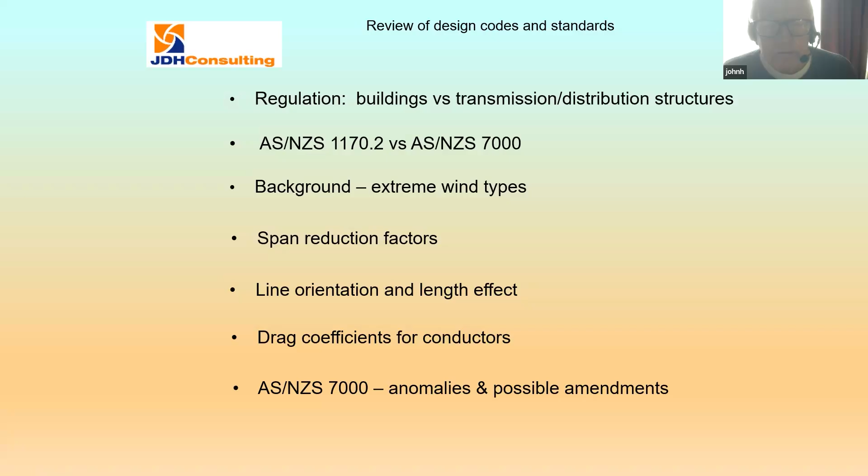So these are the topics I'll be talking about for the next 15 or 20 minutes. You can read them there. I won't go through the detail until we come to them. So the first one is on regulation, just a couple of slides and the background to why we're using codes and standards of a certain designation and what their relationship is. So most of you will be aware of AS/NZS 7000, which is overhead line design. I think the first edition was 2010. The current edition still is, I think, 2016.

Now, there's a relationship between that one and the Structural Design Actions Wind Actions Standard, AS/NZS 1170.2, which Matt and I have been involved in for quite a few years. And in my case, back to the last century I was starting to get involved in it. But the thing about it, as I'll show on the next slide, is that 1170.2 explicitly excludes transmission lines and distribution lines. So it's a problem. So this is the relationship between 1170.2 and the National Construction Code, which despite its name does not cover anything except buildings.

Used to be the Building Code of Australia. Now it's just Volume 1 is still the Building Code of Australia. And the way 1170.2 operates, it gets called up as a source of loading, wind loads in this case, but other types of loading are called up in other parts of 1170. So the National Construction Code doesn't write its own rules for structural loading, so it relies on Australian standards to do it.

One of the ramifications of that is that they're very fussy about how the standard is written. In 1170.2, you've got to use the word shall. You can't use should or may, and it has to be a well-defined path as far as they're concerned. So that's the relationship between the NCC, 1170.2 and 7000.

Now, what about the actual regulation of the structures? I know the energy networks are regulated from a financial point of view and electrical point of view, but I'm not sure how the structural side of it's regulated. It seems to me that it's largely self-regulated by the networks, and that probably goes back to the old days when each state government had its own control of its own network.

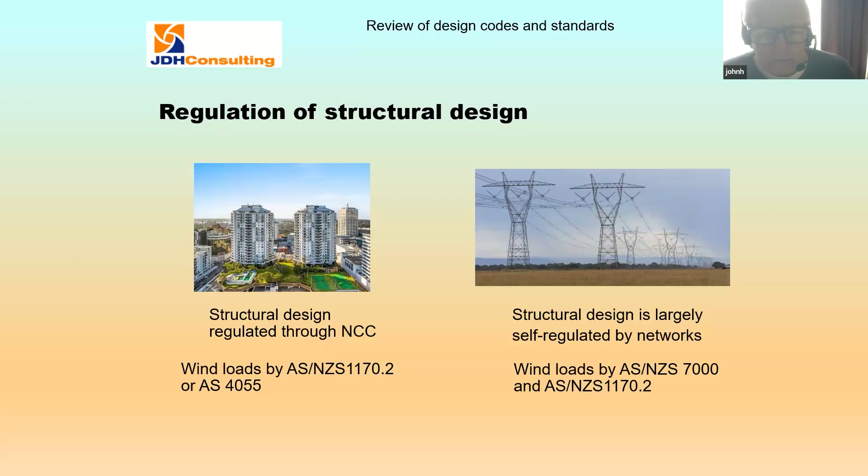But it's quite different for 1170.2. As I mentioned earlier, it's regulated through the NCC, which is effectively the law of the country with regard to buildings. So there's a difference there.

1170.2, as I mentioned earlier, page 1, clause 1.1, excludes tornadoes and excludes transmission line structures. Now, we know that tornadoes can actually damage transmission line structures as well, so it's a bit of a problem. That doesn't mean you can't use it. I think it's got a lot of useful information on things like shape factors for lattice towers and tubular towers, which you probably need to use because I don't think that's covered in 7000.

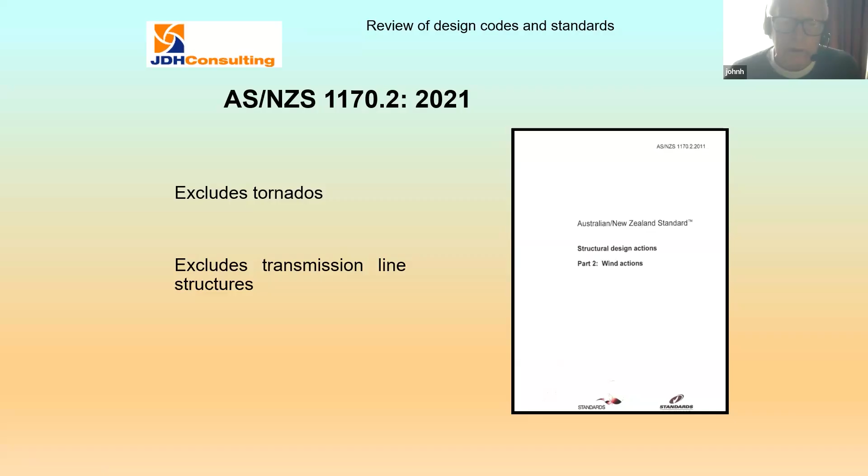It refers to 1170.2. So even though 1170.2 excludes transmission lines, we try to provide useful information in there for other structures.

Now, AS 7000. I said the first edition was 2010, and I wasn't on the committee myself, but I had quite a bit of input into it through Henry Hawes from PowerLink. He might have been the chairman of the committee, I'm not sure, but I knew him quite well, and he asked me to provide quite a few bits and pieces, especially in Appendix B for wind loads.

But in this project, I've actually gone through the front end of the standard, which I wasn't really familiar with before, and looked at sections 6, 7, and 8, and I've made a few comments on those in the 8-page report I did. And I think one of the issues is that those earlier sections don't really reference Appendix B in the right places. Maybe they're written separately or something. So there could be a bit of editorial improvement there.

Let's just go to what's in Appendix B. In 15, 20 minutes, I'm not going to go through every detail of wind loading. Just pick out a few highlights. Now, you'll see this map in there, which is not the same as the zonal map in 1170.2 for Australia. It's a special map that we produced for 7000. It really just tells us the type of wind events that are dominant in various parts of the country.

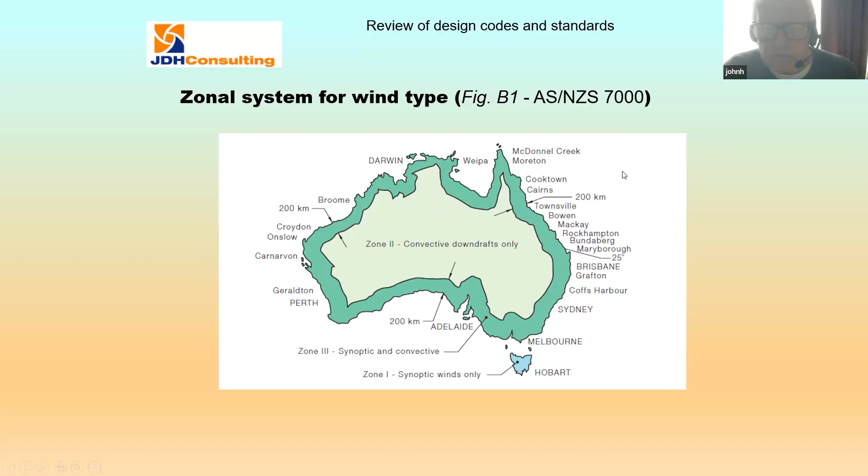I think in Appendix B, it suggests that in Zone 2, you need to design for convective downdrafts because they're basically the sum total of extreme winds. The synoptic winds are very light and not of much interest as far as structural loading is concerned. But you notice Tasmania is pretty much dominated by synoptic winds, whereas the green area, Zone 3, has a mixture of synoptic and convective events, which makes it a bit messy to codify. That's nature. I'm not going to give you a lesson on meteorology in 2 slides, but just to give you some idea of what we're talking about here.

The large-scale synoptic winds, the wind engineers sort of call them boundary layer winds because they can be reproduced in a boundary layer wind tunnel. It blows over long distances over the rough Earth's surface. If it is rough, you've got buildings in there and trees, creating some turbulence and a profile, as you see on the right there. So the wind speed is varying with height, up to probably something of the order of 1 kilometre when it's fully developed.

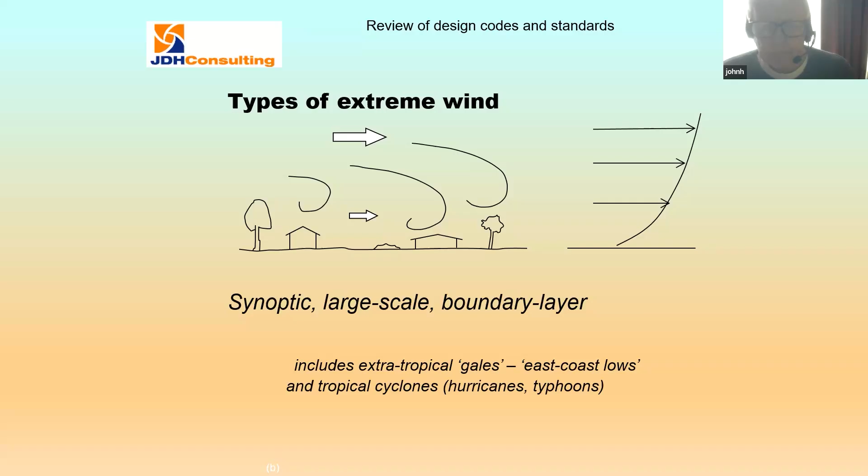So we're talking about extratropical gales is one term that's used. It also covers east coast lows that affect most of New South Wales and parts of southern Queensland, I think, and also tropical cyclones in the north part of the country, also known as hurricanes and typhoons in other parts of the world. Whereas a convective downdraft affects this middle part of Australia, 200 kilometres or more from the coast, but also other parts, but it's the dominant for the middle part of the country.

It's created by convection, as you can gather from the name, which is warm, moist air getting pushed up under convective forces to something of the order of 15 kilometres above the ground, then rapidly cooling, may produce hail or rain or both, and then becomes colder and falls under gravity, essentially, and eventually hits the ground like a jet. And it produces a small-scale frontal storm that gives a profile, as shown on the right there.

So the peak varies from event to event, but it's probably of the order of 50 to 200 meters above the ground. So instead of the 1,000 or so profile with the wind increasing, at some point it'll start dropping off. And of course these are short duration events, maybe 3 to 4 minutes typically, and affecting maybe a couple of kilometers wide. In terms of transmission line spans, I think we're talking about 3 or 4 or 5 spans typically.

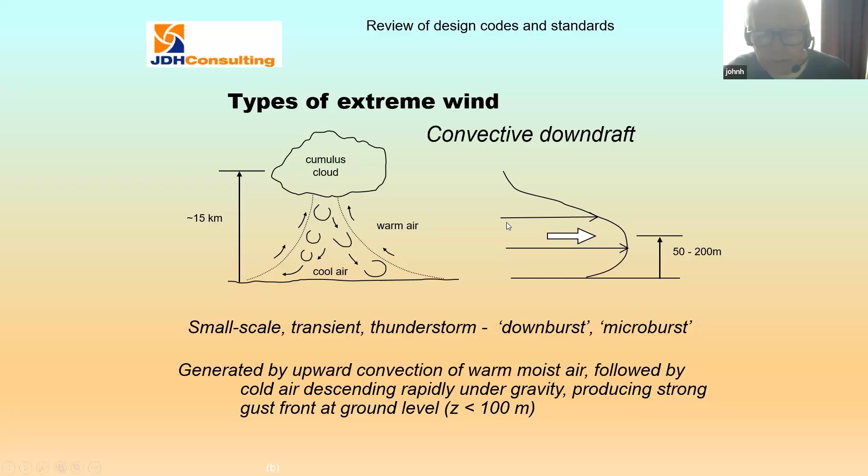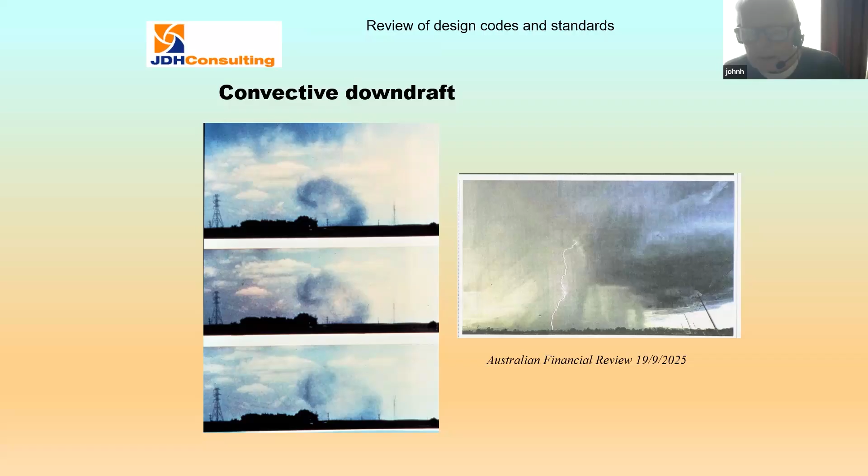The one on the right there I just picked up a couple of months ago, in the AFR, Australian Financial Review. Somebody managed to get a picture with presumably their mobile phone. And again, you see what look like distribution lines on the right there. I think they're not leaning over like that; it's probably distortion of the camera. But you see the lightning in there. So these are associated with thunderstorms typically. Though you do get dry microbursts as well, which are probably not quite the same, but they do produce this downward jet of air. So why are we interested in those events? Apart from the fact that they're the dominant event in the middle of Australia, they do damage a lot of transmission lines.

Span reduction factors, so moving on. This is something you'll find in that Appendix B. What is a span reduction factor? Basically, if you're dealing with synoptic winds, which is where the idea came from, it allows a reduction in the peak load, assuming that the peak pressure does not occur even over one span in synoptic winds. Just the fact that we've got turbulence in there, which is gustiness, producing fluctuating pressures that don't occur simultaneously. The peaks don't occur simultaneously over even 500 meters. Could be typically 100 or 200 meters maybe.

But in general, if you're in a rougher terrain, which gives you higher turbulence or gustiness, then you'll get a reduction in load through a lower reduction factor. On the other hand, these convective downdrafts, from the information we have got, which is a bit limited, certainly indicate that the turbulence is effectively lower because the wind is not blowing over this rough terrain. It's coming down from above, so there's not a mechanism for generating as much turbulence in the flow.

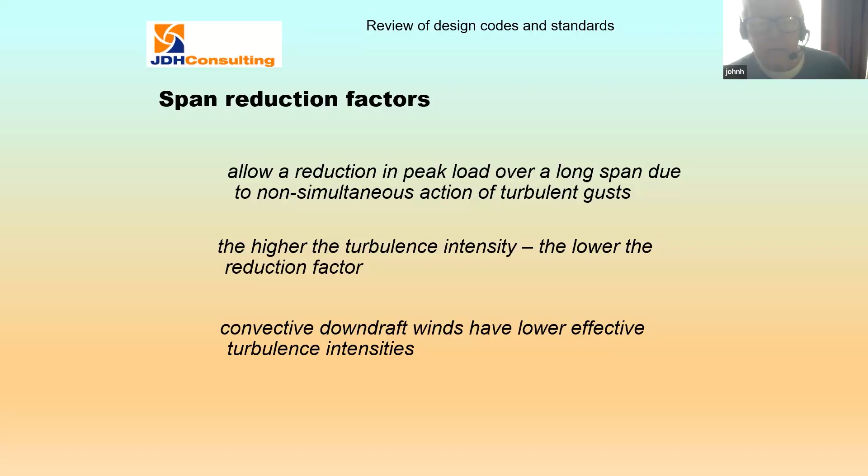So that means you've got lower turbulence, you're going to have higher span reduction factors, which means less reduction. And the result of that is we have figures in the Appendix B of 7000. This is for synoptic wind span reduction factor. Some of you may be familiar with it. So what it's telling you, that figure B5 there, is that if you've got a span of 500 meters, you're getting a factor of 0.63.

So that's like a 37% reduction in load just due to the fact that you've got this turbulent wind acting over a span of 500 meters. So there's a significant reduction. And you find around the world where the synoptic winds tend to be more dominant, that these, or similar values, get used very widely in other parts of the world. So these are valid for these large-scale synoptic winds.

But on the downdrafts, because the turbulence is effectively lower, figure B6 in Appendix B gives you a reduction of only 9%, a factor of 0.91 for that 500-meter span. So I think it's effectively a 40% increase in load. So if you talk about the same wind speed, say a 40 meters per second gust, a 40 meter per second gust in a convective downdraft is worth 40% more than the same 40 meters per second at a point for synoptic winds.

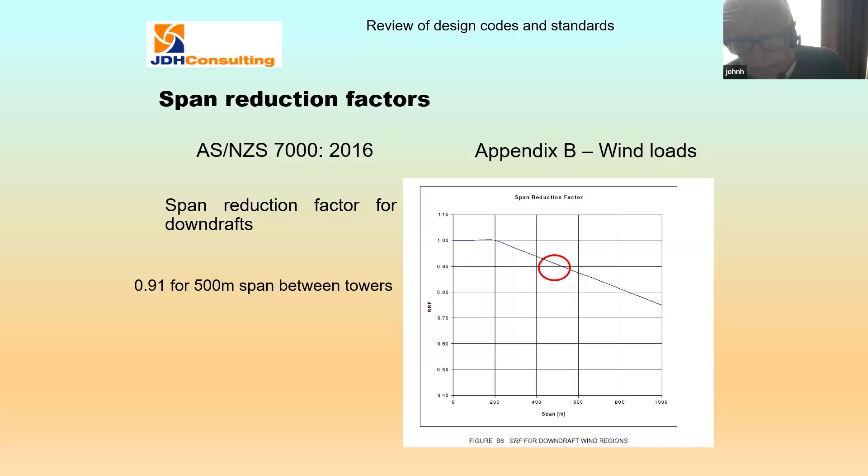So it does make a difference. Actually, that probably explains why we're getting a lot of these failures due to those type of events, and not so much due to synoptic winds.

Right, now moving on to line orientation and length effect. There is a clause in AS 7000, it's sort of an informative clause really, that says, as you can read, the return periods are appropriate to individual structures affected by either wind types. So that's in 1170.2, which is basically in there for buildings. We're interested in designing a building which effectively is at a single point. But we're talking about a transmission line which may go for 100, 200, 500 kilometers even these days.

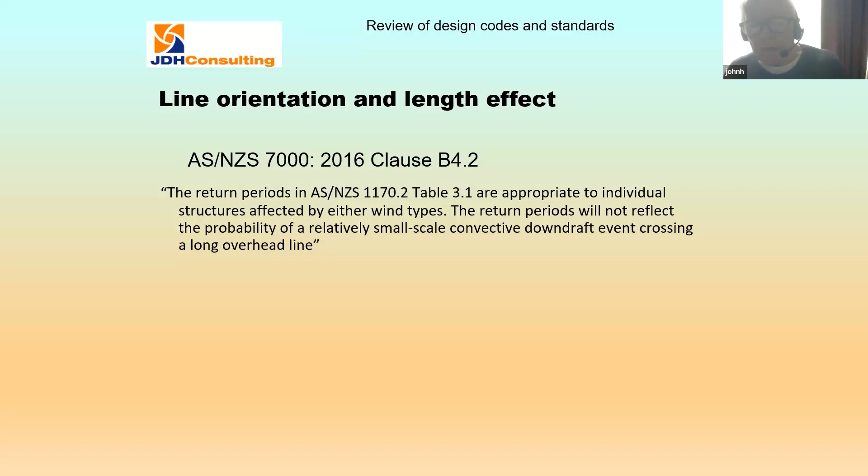Those return periods won't reflect the risk or the probability of a wind event such as this convective downdraft crossing somewhere along the line rather than at a point. And the result of this is, if you don't really take account of that, you might get some failures. And last year we had a few failures, Victoria and Broken Hill, New South Wales, and some of you may remember those. This year seems to be a bit quieter, fortunately.

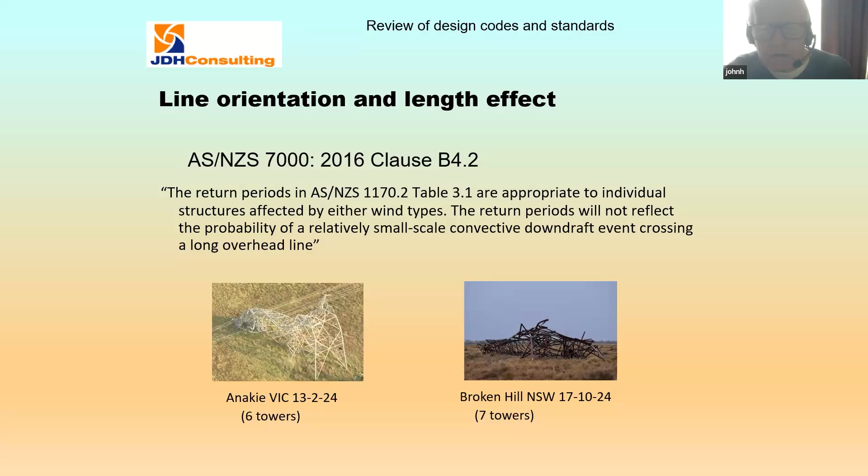But if you think about it, these storms are, as I say, a couple of kilometers in width. But if you put a transmission line in there of 100, 200 kilometers long, it's like a fishing line, and you're catching these things periodically. So you probably need to be aware of it. I'm not suggesting that you need to design for 1 in 500 or something for a whole line, because that wouldn't be economic. But I think designers should be aware of the risk of these events occurring.

Now, going back even to the late 90s, myself and Stephen Oliver, who's probably not on the line today, but he's part of this project, produced a model for calculating the risk along a line like that. And it started off with just one of these events. We simplified it with a rectangular footprint with a certain width and a certain length, and looked at the chances of that footprint intersecting with a line of length L mathematically.

And Steve actually wrote a computer program for ElectraNet. I see Roger's on the line there. He's hopefully using it. He might be able to tell you how he finds it. But I think it does give you a pretty good idea of the sort of risk on the line, depending on its length and also its orientation, north, south, east, west, or whatever.

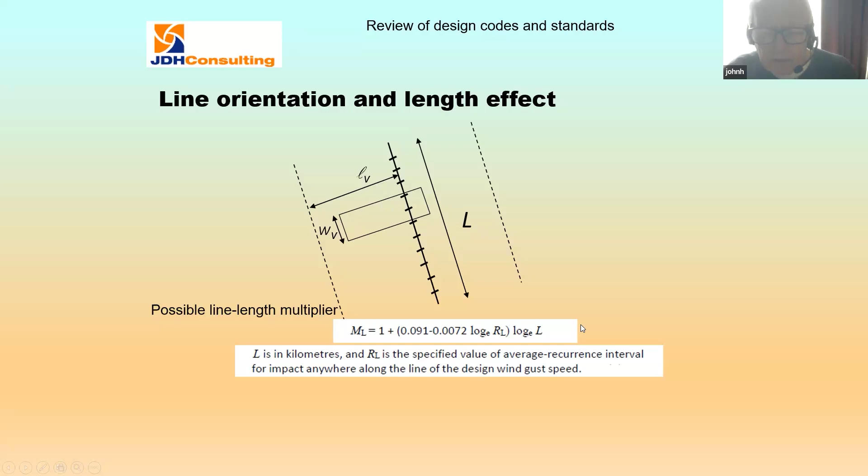Now, from a code or standard point of view, you're not going to embed a computer program in the code or standard. We haven't got to that stage yet. But one of the things I did for ElectraNet, I'm not sure they use this, but looking into the future maybe, is putting something like a line length multiplier in a standard, maybe 7000 or somewhere else, where it does recognize this length effect. The line orientation can be taken account of through the wind direction multiplier that we have in 1170.2.

So it could be something like this, and I've put some numbers on there to show how this could be used. Now, don't take the numbers seriously. These are just sort of notional numbers, not necessarily recommending any particular numbers for this. Those constants in there were just a fitting to the results of the computer program.

Wind risk that Stephen Oliver produced. So this might be an example here. So you have a line of length 120 kilometers. Let's say you want to design for 1 in 20 years. Well, this is average recurrence interval: 1 in 20 years average recurrence interval of reaching a certain wind speed on a line of length 120 kilometers.

So the way you would work that out and account for the length effect is you'd look up 1170.2, and V20 in region A5, which is mainly South Australia and Victoria, was 37 meters per second. If you're trying to design for the whole line, you wouldn't use that wind speed with a certain risk. You'd try to adjust it for this length effect. You'd include the direction multiplier, which is in 1170.2, which for an east-west line is averaging out as 0.875. So then you apply that formula ML and put in the RL and the length of the line L, 120.

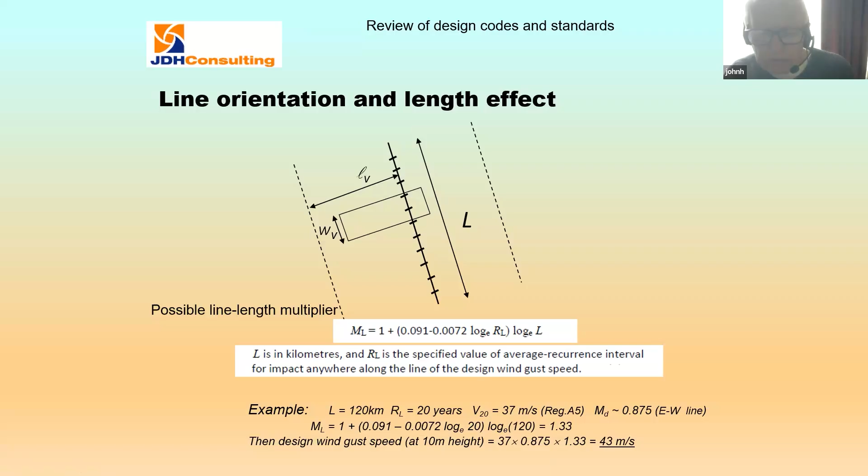It gives you 1.33, and then your design wind speed, taking account of MD and ML, would be 43 meters per second. So, as I say, don't take the numbers seriously, but that would be, for this notional line there, the wind speed you need to design the structures all the way along the line in order to limit the risk to 1 in 20 years, or 20-year average recurrence interval.

All right, moving on. How are we going for time here? Probably another 5 minutes or something. So moving on then, you can ask questions about that maybe a bit later.

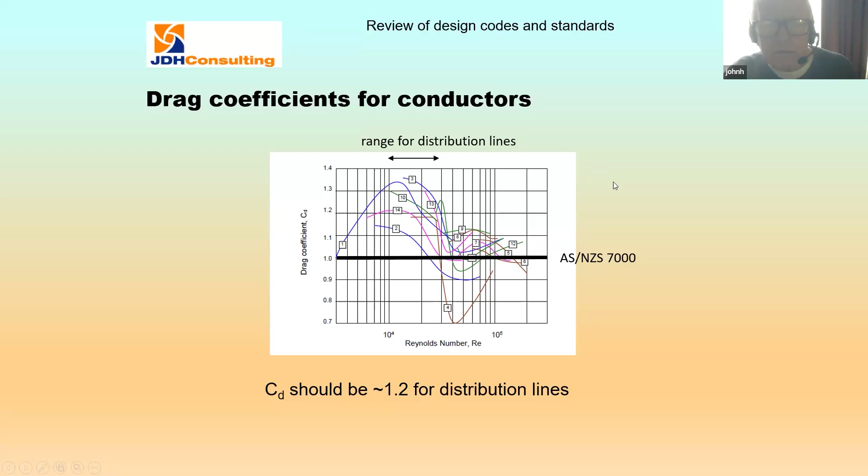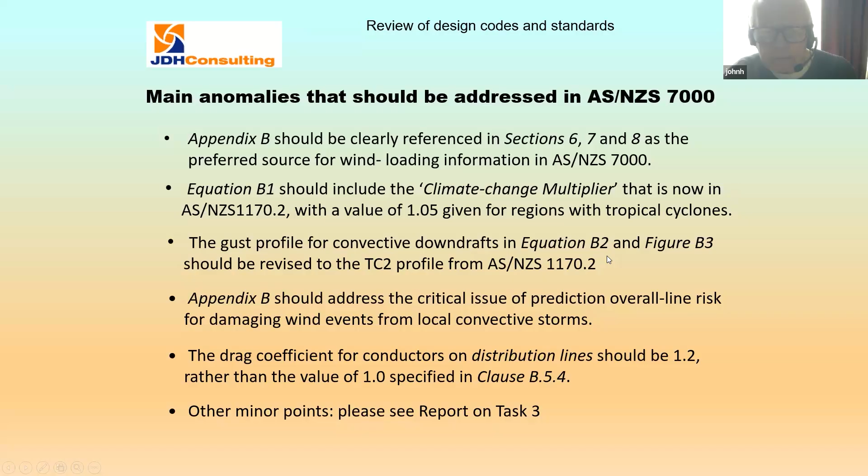So these are a few of the anomalies that you'll see in the report that I've highlighted with respect to 7000. It hasn't been revised since 2016. So if it does get revised, then a few of these things should be looked at. I'm going to be running out of time, so I won't go into the detail of them, but again, it's in the report that I produced.

And I think after the first edition of the report, some comments came back and said, well, you've covered transmission lines themselves and towers. What about other infrastructure such as substation gantries? Sorry?

Substation gantries? Talking about substation structures? No, sorry, I had a mental break here. Substations, electrical substations, we're talking about here, sorry. How would you deal with those? And of course, that's difficult.

It's the problem we have come across before, though, for a similar problem with any kind of industrial structure. You've got a whole lot of elements in there, and things like power stations and refineries, etc. And each one has got its own contribution to the overall wind load. But you're getting shielding and interference between one part and another. So it's very hard to codify this because they're all different from each other.

But what we've got in 1170.2 is a method which I think people have been able to use, they tell me. I've had a lot of feedback from it since we put it in there. This is a way of doing it. What we do have in 1170.2 is a method of dealing with a series of building frames. As I said, the standard is written basically for buildings, and you might have a series of frames erected without the cladding around the building. And they might be exposed to the wind for a certain period. So there's a way of dealing with that.

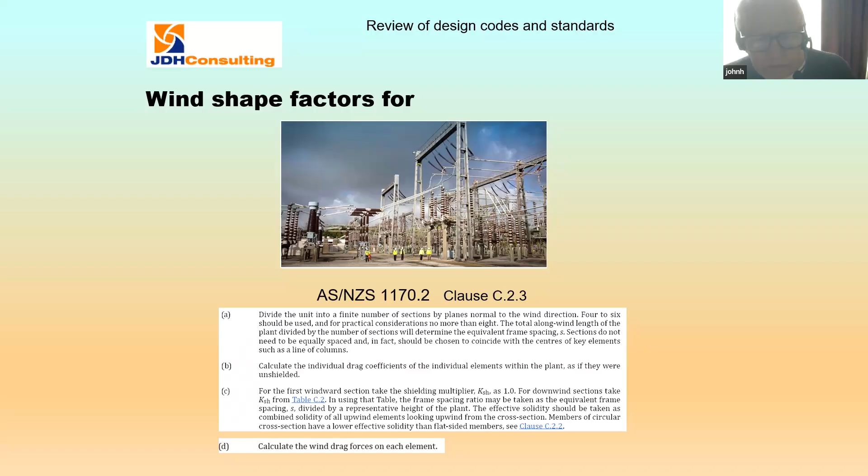That's all I had to say. Hope I haven't gone too far over, if at all. Thank you, John. Really interesting stuff, getting into some of the detail. I was just tracking the questions and comments in the chat. Okay. A couple in there from Raju and from Francis.

So Raju mentioned that he's been using the model that you and Stephen developed. The question from Francis around that, for either yourself, John, or for Raju: using the wind risk model from John, how do the wind speeds it gives you compare to the values following AS/NZS 1170.2? Is it higher or lower or the same? So either yourself, John, or perhaps Raju, if you'd like to comment on that quickly, and then we might throw to Matt to get on to some of the other content.

I'm happy to take this if John allows me. John? I don't know. Was that a question for you, Raju, or for me? I'm not sure. Yeah, for me, but I'm happy to. We both developed this solution anyway. So I'm happy to take this one. Let me spend maybe 30 seconds.

1170.2 provides the design wind speed for an isolated location. Our wind risk model allows us to account for the line length, line orientation, and the past incidents, and then projection of the past data to the future. For that reason, in the majority of the cases where lines are positioned north-south or at an inclination, we always get the design wind speed higher than 1170.2 for the given recurrence period. We have found a few lines where the line is short and runs east-west. That means the along-the-line direction has less effect. In that case, we find it comparable to 1170. There's no case we found where the wind speed calculated by this model is less than the 1170 value.

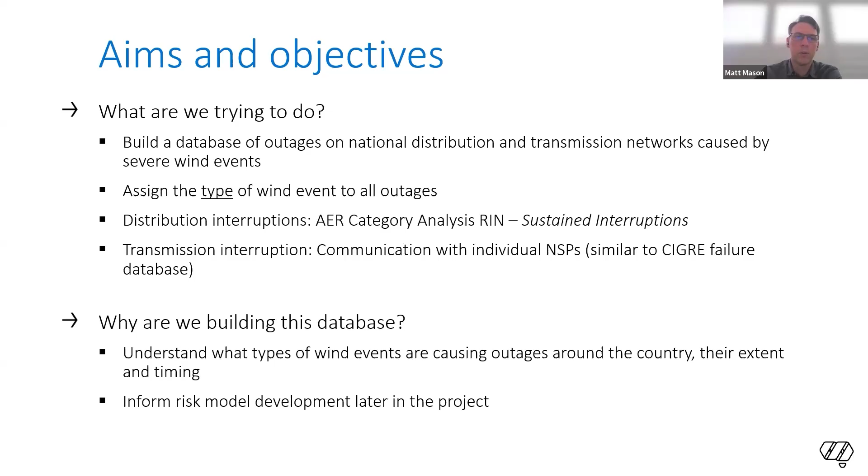And the other thing that we're going to do with this is inform another output of the project, which is the development of a risk model, very similar to what Raju was talking about that ElectraNet is using. At the moment, we're looking to develop something similar that we can have as an output of this project.

So here's a summary of all the distribution and transmission networks around the country. The ones that we've got a tick are where we have the interruption data already. We largely have this from the period from 2009 to 2024, and this is essentially the distribution networks. Through the RIN data that's been provided to the AER, we can get it for all the distribution networks that fall underneath that.

But we've also been able to get, through the Project Management Committee, some data from Western Power, and through another colleague, some from the Northern Territory as well. So we actually have a pretty complete database of interruptions at the moment for the distribution network, but we're still working on getting the outages on the transmission line network. So going forward, if Damien hasn't been in contact with any transmission people here, I'd be very happy to start that conversation so we can get that data.

And just as a snip of what we're taking, the information that's provided by each of the distributors to the Australian Energy Regulator has a range of information, but what we're really looking at is the data that's in here.

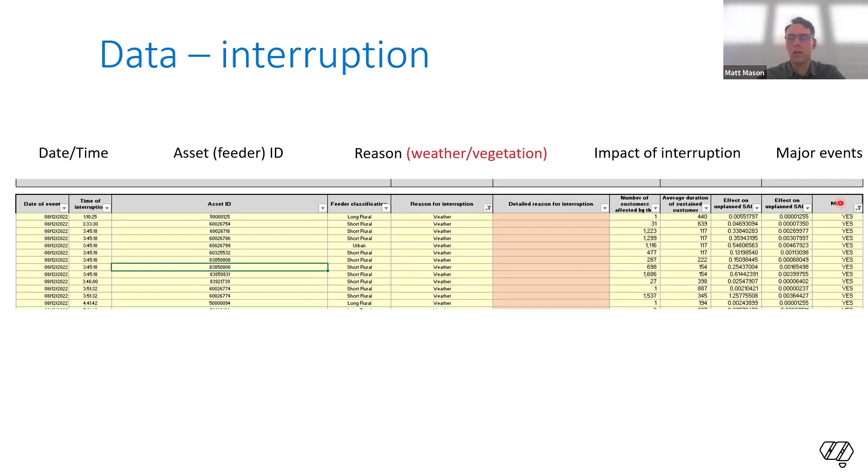We've also pulled out information on what the network structure is itself, and we do this through a combination of data that we're able to source publicly through the public asset location information, which some of the providers have freely available online, and we have sourced for all the other distribution networks through Rosetta Network Map, which is a company that many of you will actually use to do the mapping of your network.

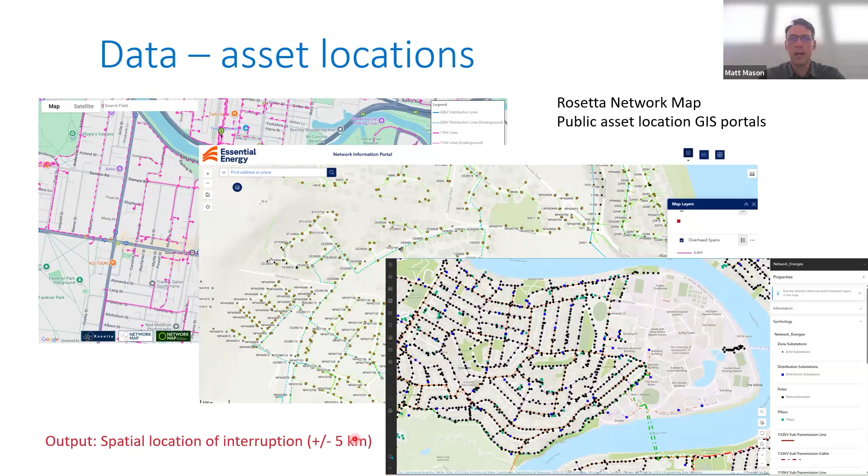And really the reason for doing this: we don't actually need to know the location of every single asset on a network to do the analysis we want, but we do need to be able to identify where the assets listed within the interruption data are; we have to know a location of those. And generally, a plus or minus 5 kilometers is suitable for what we're trying to do, because we're trying to link this with classifications of different types of wind event that have been made before by another one of our research partners.

So Andrew Dowdy, who is at the University of Melbourne, has done quite a lot of work over the last decade or so using global reanalysis data to classify different types of storms and different types of windstorms. So the idea is if we know the location of the asset that's had the interruption or the fault, we can then link it back to these existing databases of severe wind events, and then we can classify the type of wind event that has caused it.

And the types that we're really looking at is determining whether it's a tropical cyclone that has damaged the line, thunderstorms, fronts, east coast lows, and really also to identify whether the outage was due to something that was not a wind event, which obviously then we want to remove from the database.

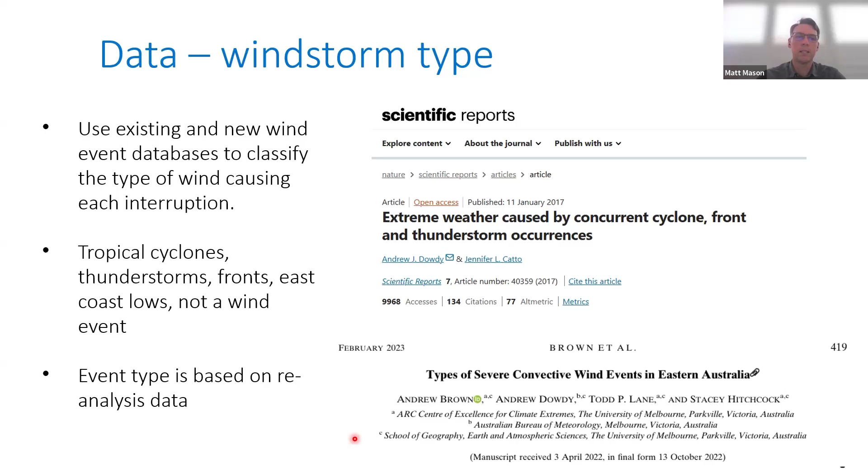So the request I have for any of the distributors that are on in the seminar is that the asset IDs we have within the RIN database are either feeders or zone substations sometimes, but sometimes they're even at a larger aggregated level. But these do not match the IDs that we have within the asset maps for the networks, or the network maps of the assets. And if we can't link the two together, then we can't actually assign the geographical location of the outage.

So what I would ask for any of the people on the call is if you're able to share with the research team just the linkage between the IDs that get used in the RIN reporting to the IDs that are used in your network maps, that will allow us to make that link from one to the other and will allow us to continue. So if you are able to share that, that would be very, very useful. Otherwise, we have some more roundabout and less accurate approaches that we can adopt. But if those direct linkages are able to be shared, that will be extremely good.

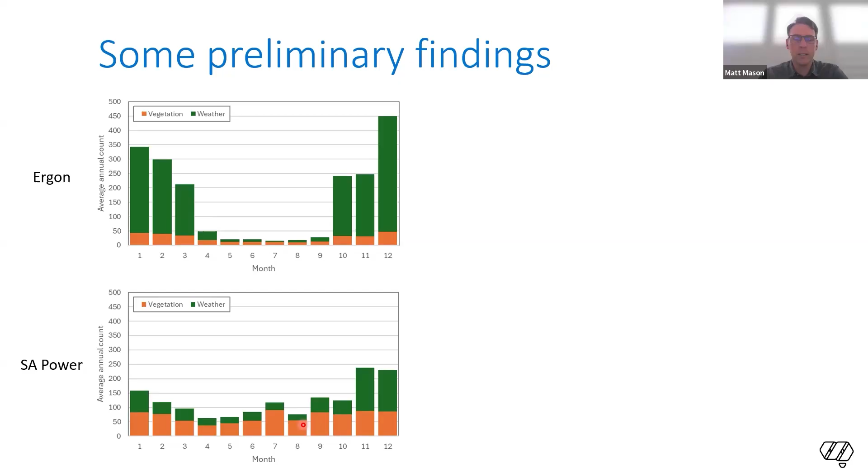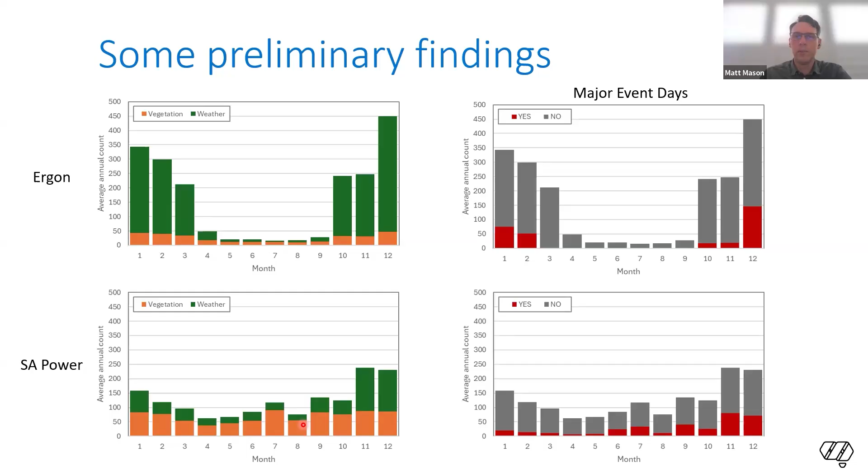And then the last thing which I found quite interesting was if we look to see when the outages are occurring, so whether they're on major event days or not, the vast majority are not on major event days, which was a bit of a surprise to me, but perhaps is not to some of the distributors on the line. But anyway, I think I will leave it there. So we do have a little bit of time for questions, and I'll maybe turn it back to you, Brendan.

Yeah, great. Thanks, Matt. Interesting results, and I think you're speaking a language that a lot of people on the call really understand. Penny, you've got your hand up. I'll throw to you for your question. Quick question, just to find out what was the timeline on getting the information to you? Is that like a before Christmas task or a January task? Yeah, I think obviously the sooner the better, but I'm not going to push you to do it before Christmas, Penny. No. Yeah, so January is perfectly fine.

Yeah, when we initially set out the project, this was something that we had early on to start with, but because we've had a couple of these issues, we've just started doing other parts of the project so we can shift it a little bit later. So January will be perfectly fine. And sorry, I see your question in the chat there. The idea is not within this project to do the vulnerability curves, but I'm happy to have a chat to you about that because I have a couple of other students working on that alongside this project, but it's not actually part of the deliverable here.

Yeah. Thanks, Matt. Thanks, Matt, for going through that work today. I think it's been really interesting. I think it gets down to an interesting level of detail, sets up pretty well what the project is looking to do. And I really like taking the opportunity just to reach out to everyone on the call. If you've got that information that Matt and team are seeking that can help, please pass it on. More information, the better.